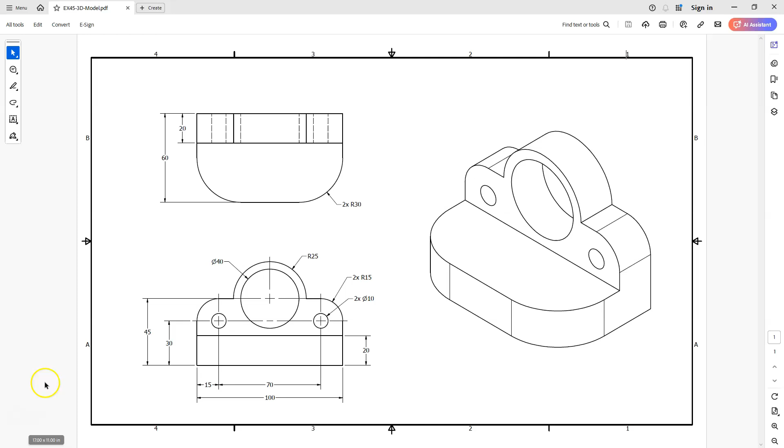Now, if you followed along in the AutoCAD video where I created this using 2D AutoCAD, you'll see that I already have the isometric here. We can go ahead and copy and paste this into our other drawing and start from that way. But in this video, I will go ahead and draw the isometric for you again. I'll also show you just how to copy and paste this, and it's just that simple.

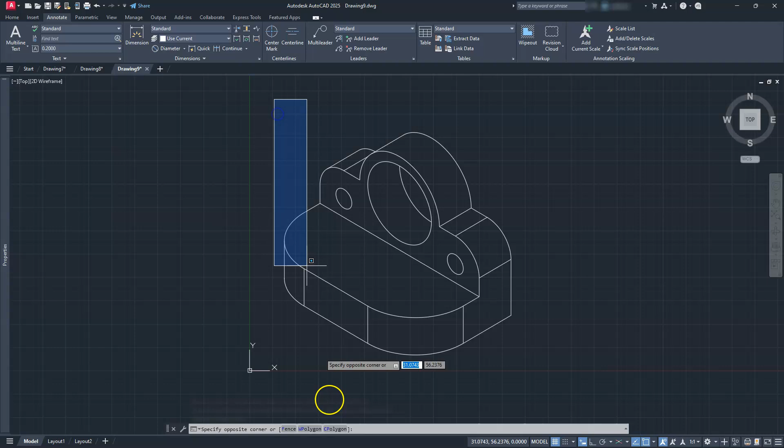We can just highlight this and use the regular Control-C. We can copy this, and then we're going to create a new sheet here, and then I'll paste it. So I'll just come here and go to Control-V. Once everything loads up, there we go. So now you can see that it is sitting there behind it. I'll zoom the extents here in a second and you can see it. Rather quick way of doing that, but let's go ahead and draw this from scratch. So let me delete this real quick, and let's get started.

The first thing we need to do is set AutoCAD up into isometric. It's just simply by selecting that button there. Let's turn this grid off; there's no need to show that. And make sure that we have our ortho on. I can also verify what running osnaps I have on, and these are the ones I'll be using for this video. Now we have our isometric set. Remember that we can shift everything with the F5 button, or in this video I'll be using the flyouts next to it, but you can also cycle through these with F5. Let's start with the line.

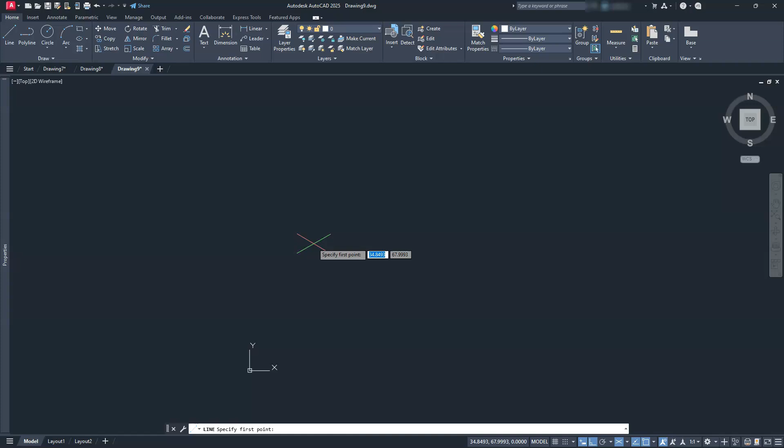Let me jump back to the Home tab and use a line. I'm going to lay out this bottom portion here. I'm just going to go right around this way and give this a distance of 100. Let's go up this direction, a distance of 60. Back this direction, 100. And then C to close. Let's switch this to isometric right. Then I can start creating this other side here. I'll use a line from this endpoint and go up a distance of 45. I'll come forward a distance of 20.

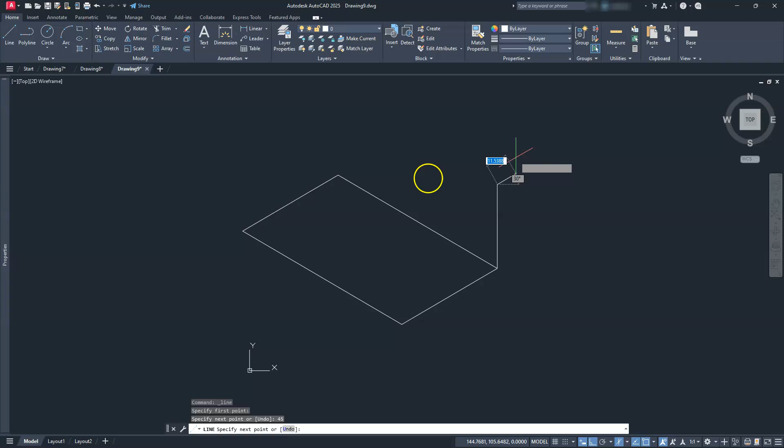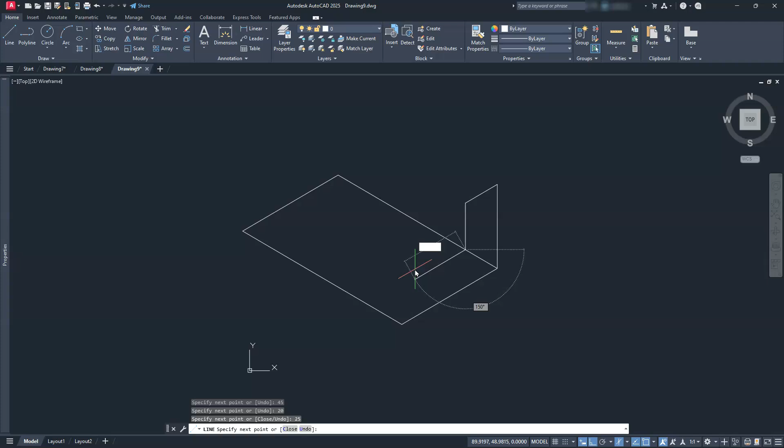Now we have to do a little subtraction. We know that we went up 45. Let's subtract the other 20, so we're just going to come down a distance of 25. We'll come back this direction, and remember that that number was 60. So if we subtract that 20 from that, we'll have a distance of 40. And then we'll come right down to that endpoint. So I'm just laying out a rough stick figure here.

Now, this is totally different than what I did in the other video. I'm just showing you that if we didn't have those curves, we could create it exactly like this. But since I do have those curves, I'm going to get rid of this portion and then create it. But if I didn't have those curves and was making everything with sharp edges, let me finish this just to show you the difference. We can create this shape here, and all I did there is copy that. If you don't want to do that, I can simply go back to isometric left and start a line from this endpoint.

See, it looks like I'm not in the line command. Then we'll go over this direction. Remember that distance is 100. We'll go down 20.

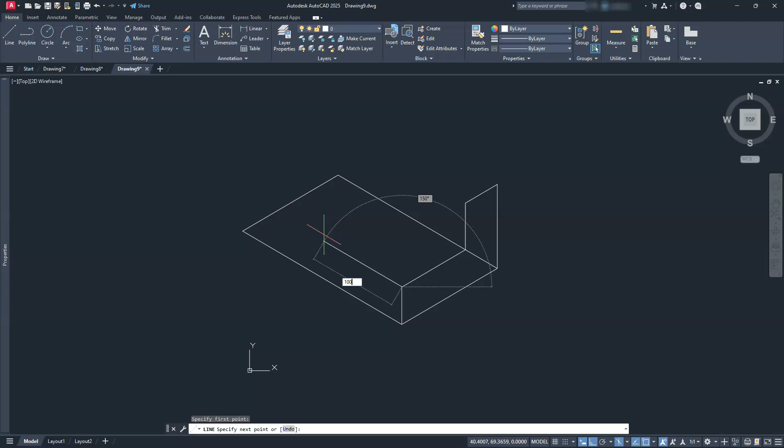Then we can utilize the copy command and grab all of this. So I could just select these lines here, choose copy,

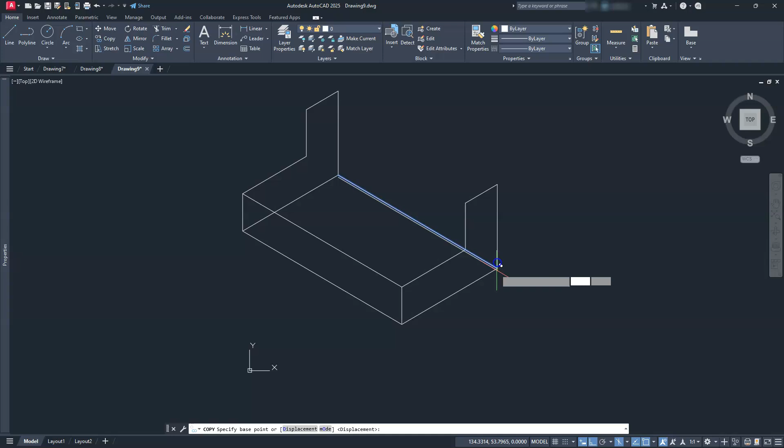go from this endpoint over to that endpoint. I can copy some other lines here. Let's use this and copy that line from this endpoint, and then I can just place it at 3 different locations, right? So one there, one at that endpoint, and then another one at that endpoint.

Let's go ahead and delete this line since there's no need to see that one. And we should be able to get rid of these two lines.

Okay, so this is kind of what I was referring to. If these were all nice and sharp corners, this would be no problem for us. But since we do have these round fillets on here, and we can't use the fillet command, we have to create those. So the next step I'm going to do here is switch back to isometric top, and I'm going to go ahead and put the fillets that are located on here, right?

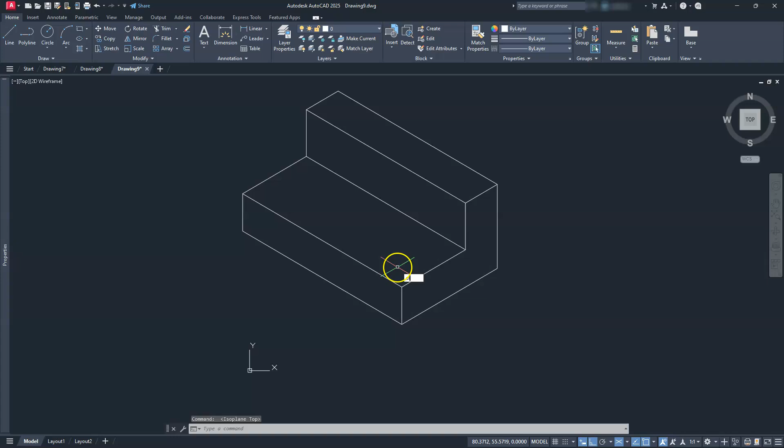The way that I'm going to do that is I have to start off by typing in EL for the ellipse command. I have to give it a point. I'm just going to click this endpoint for now. Oh, I took one, I'm sorry, I always make that one mistake. Let's escape out of that. Let's go EL, enter. There we go.

Click this endpoint here, and then I have to tell it that I'm using an ISO circle. It looks like I did it again. So EL, enter, I, enter, and then click this endpoint. There we go. Once I do that, then I can give it the radius here, and the radius is going to be set to 30.

What I like to do from this point is I'll just go ahead and copy this circle to the other side. So I'll select it here, go to copy, go from this endpoint to the other endpoint.

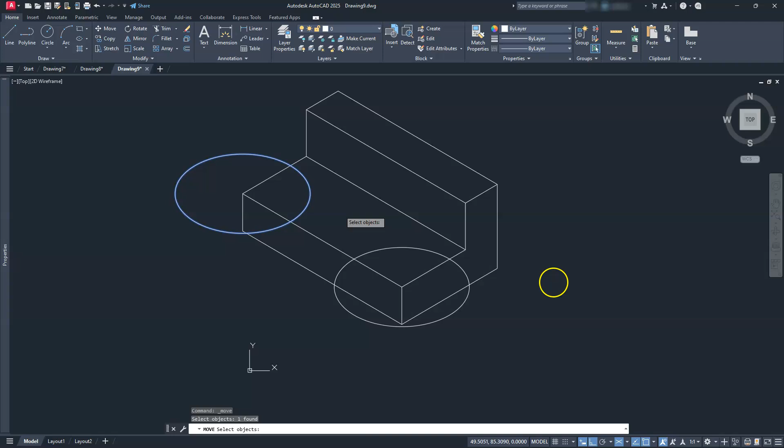And what I'm going to do next is I'm just going to go ahead and start moving some things, right? So I'll go to move, select this ellipse, hit enter, come this direction. So I selected a line, come that direction, type in 30, do the exact same thing with this one.

So I'll select here, and then I'll use the move command. Select this endpoint here, or just select a point here, and go that direction, give it 30.

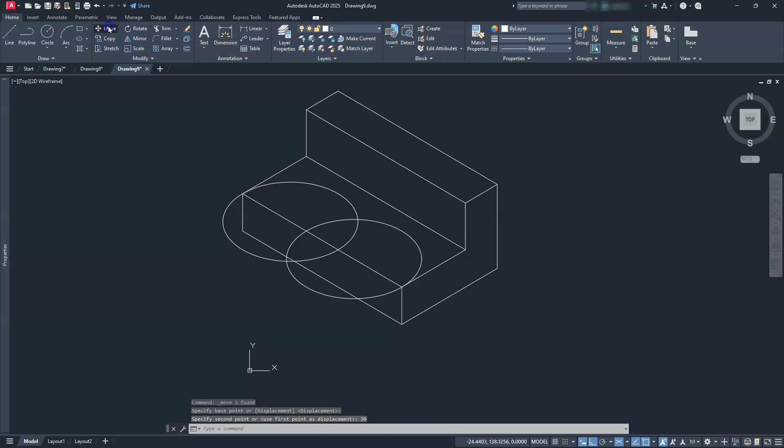Go back to the move command. This time select both of your circles. Enter. Pick a base point, go this direction, 30. Okay, so I have these two arcs here.

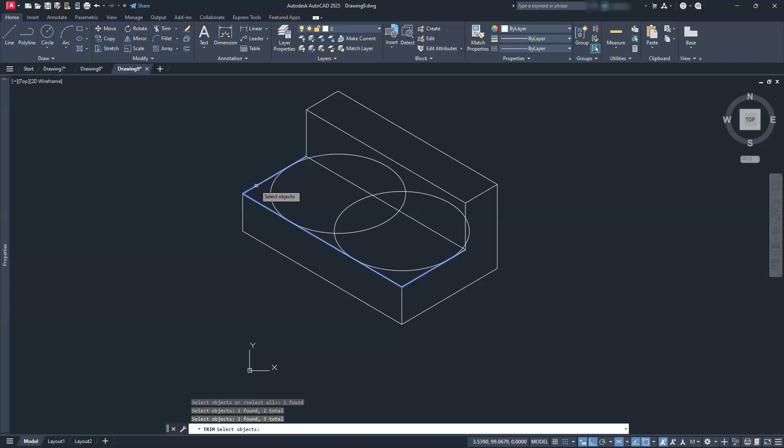Let's use the trim command, and I want you to go ahead and use cutting edges, just so it'll save us some time. I'm going to select this line, this one, and this one. Enter. And now all I have to do is just trim off these portions, right? So it should trim there and trim here.

Okay, next thing I'm going to do is copy these two arcs from this endpoint, going straight down to this endpoint.

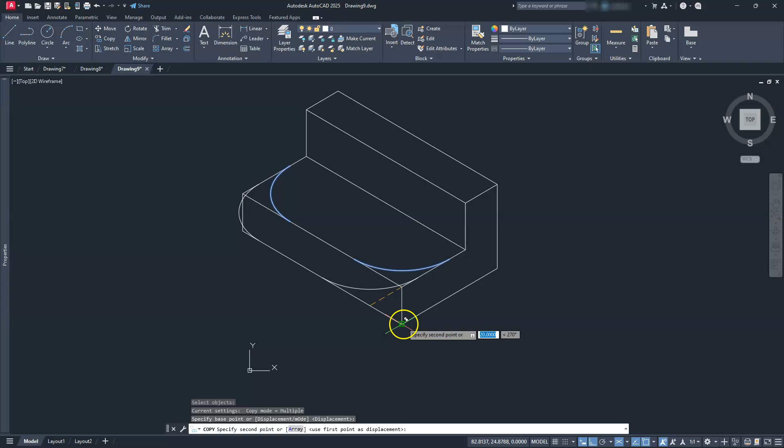Okay, so on this side, I'm just going to work on this half. I'm going to select the line here, go to move, select this endpoint, and then I'm going to place it on this midpoint here.

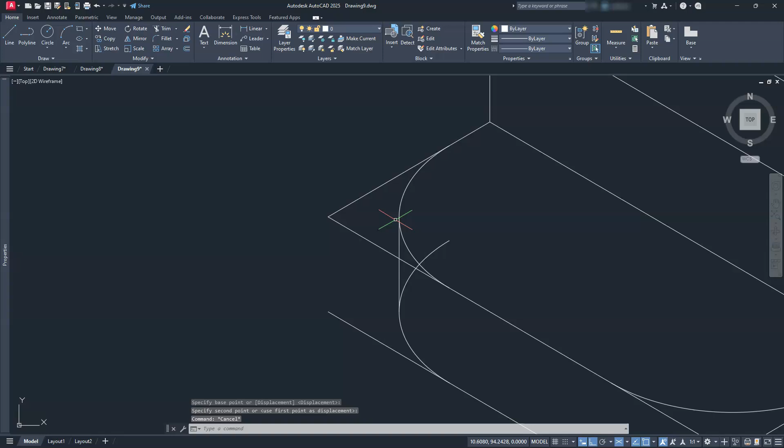I'm going to come and take a look at this side. Select this line here, and this time I'm going to choose copy. I'm going to use this endpoint, and then I'm just going to copy it at that endpoint and at this endpoint. Okay? All right, so now we should be ready to trim.

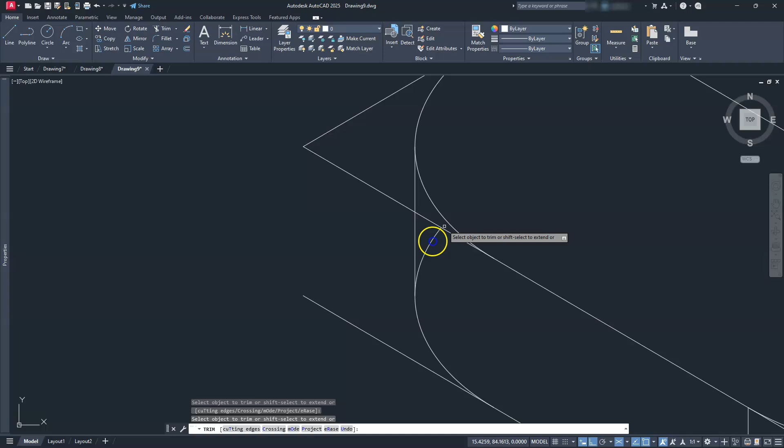So let's go to trim. Let's work over here first. So we're going to trim this back right until it gets to that line.

We can go ahead and get rid of this line here and this one. Let's go ahead and trim all of this stuff back. Next, let's work on the other side here. So let's pan up. We'll go ahead and trim both of these lines.

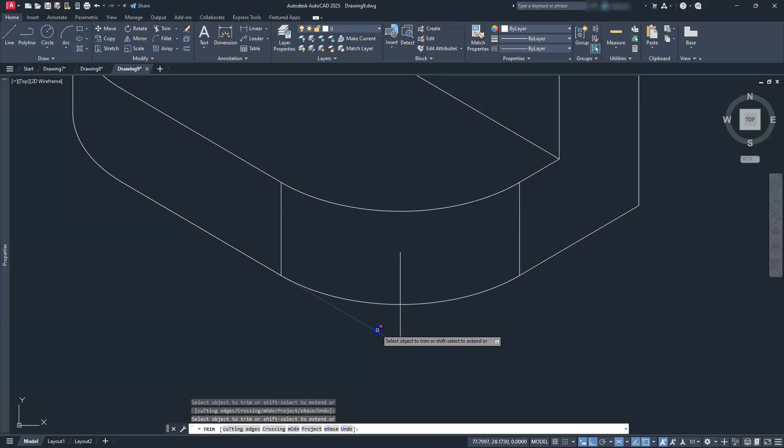Both of these lines, and then this line here, we'll trim it twice to get rid of it. Let's escape out of that. So now you see that we do have that created. That's the bottom portion.

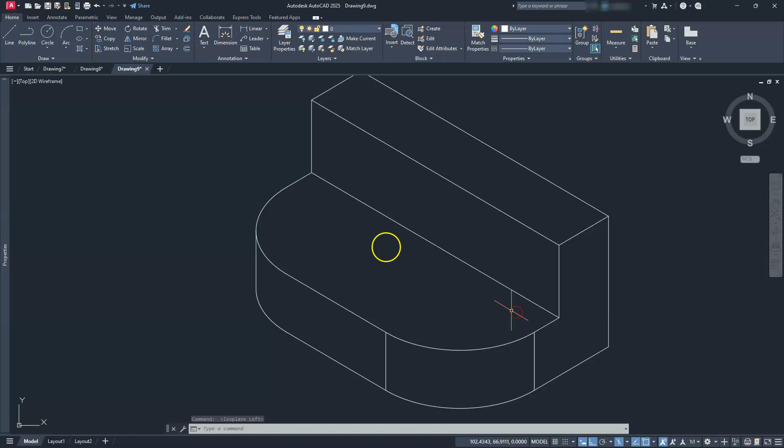Next, we'll go ahead and put our fillets that are located on these two corners here. To do that, I'm going to first start off by switching to an isometric left. Exactly like we did here in the beginning, we went to the ellipse command. Type in EL, enter. Tell it that you want to use an ISO circle, so type in I, enter. Click this endpoint, and then give it the radius, which is going to be 15.

Go ahead and copy that circle, so I'll use the copy command. Select here, going from this endpoint over to this endpoint. Remember we did the move thing, so let's go ahead and go to move. Select this circle here, hit enter. Click here, come down this direction, a distance of whatever the radius is. In our case, that number was 15.

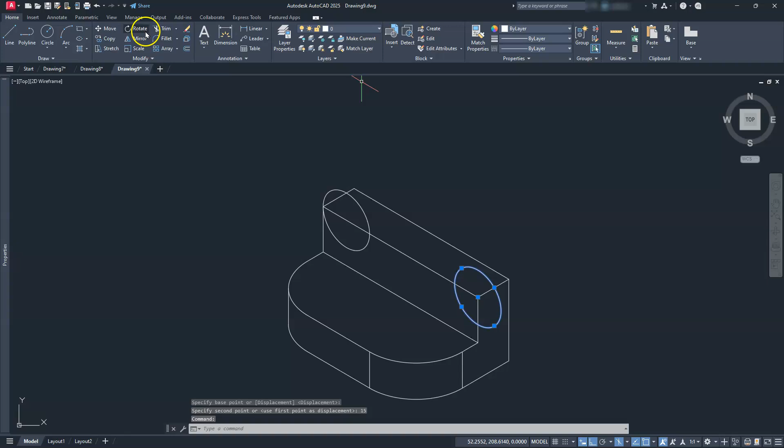Do the exact same thing here on the other side. So I'll select, go to move, click a point, drag this direction, type in 15, then select both of the circles, go to move, pick a base point, and then send this one down, 15.

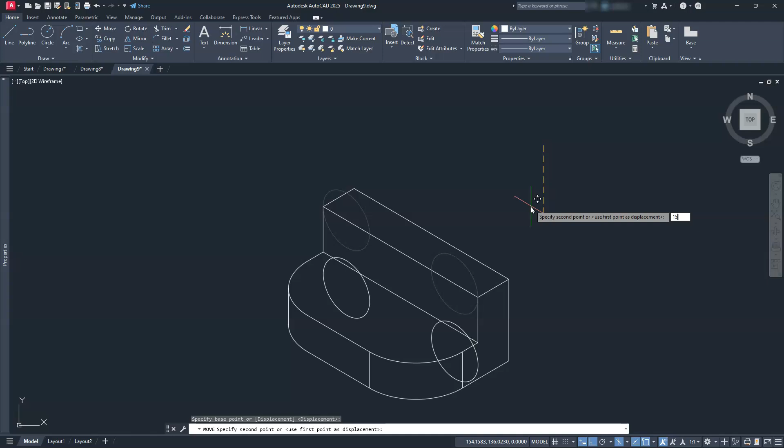Trim command again, so let's use trim. We're going to select cutting edges, so go to cutting edges, select these 2 lines here, so I got one there, and one here. Enter. Let's go ahead and trim off these portions.

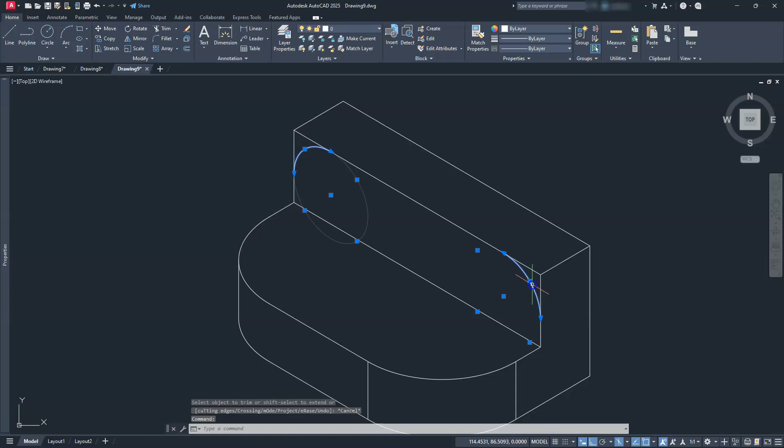Select both of those arcs, and then we're going to go ahead and copy them, right? So I'll go to copy. I'm going to use this endpoint to this endpoint.

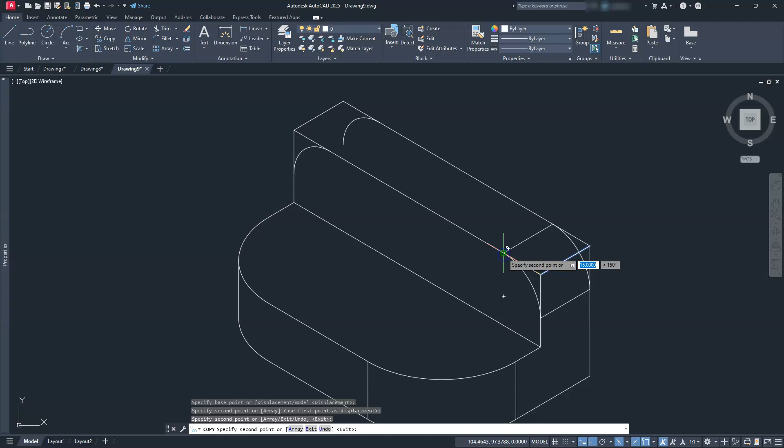I'm going to select this line here, I'll use copy. I'll use from this endpoint, and what I'm going to do is select - it's going to be an intersection or an endpoint here. We should have another one here. It's going to be one on this side. Let's see if I click. There it is. And then we should have a midpoint or a quadrant here.

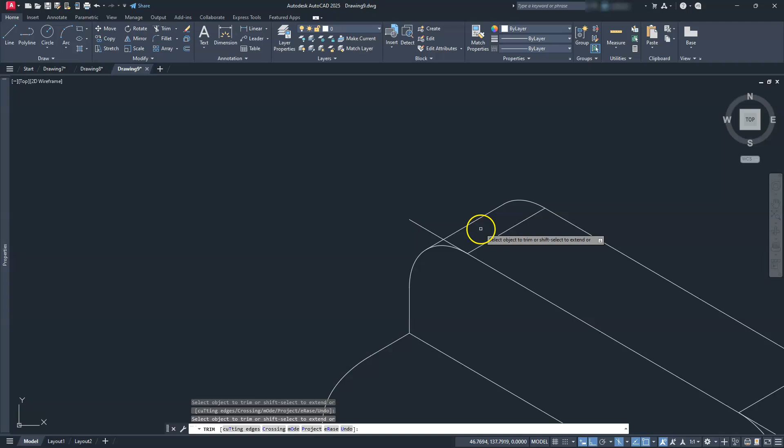Now I'm going to purposely leave this front line intact, right? So we're going to go to the trim command, and then I'm just going to trim off some of these lines. Starting on this side, I'm going to trim here, this portion, and then here. I'm going to trim off this bottom piece here. Now, like I said, I'm going to leave this top line intact.

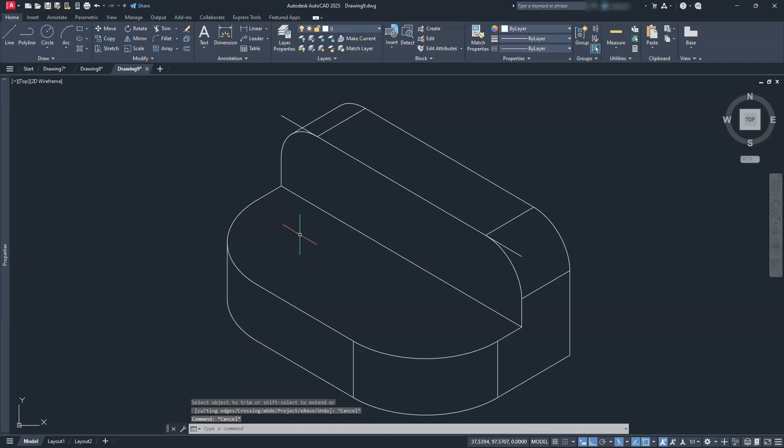Let's go ahead and work on this side. We're going to trim off these 2 lines and this one. Let's go ahead and get rid of this line now, we don't need it. Okay, let's go ahead and escape out of this command. So now we have this created.

Now the reason I left that there is because I still need that midpoint there in order to draw my other 2 circles here. So I'll go back to the ellipse command. EL, enter, I enter. Let's go ahead and click on this midpoint here and then draw the radius, which is 25.

Okay, we're going to do that again. So we're going to type in EL, enter, I enter. I'm going to go to this center. This time we're going to change to a diameter, so I'll select the diameter and then give it the diameter, which is going to be 40.

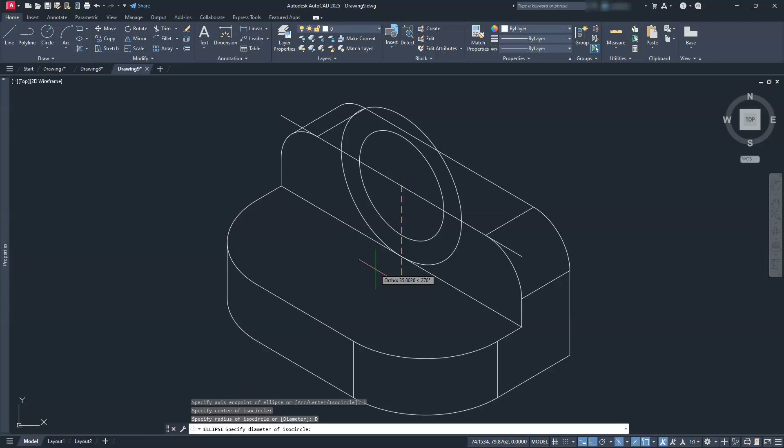Let's go ahead and copy these 2 circles. I'll go ahead and pre-select them, so I'll select both of them here. Go to copy. I can use this endpoint to this endpoint. Okay, let's escape out of that.

Let's go ahead and select this line here, use copy. Let's see, it looks like I may have lost that line, so I'll go to copy, select objects, hit enter, go to this endpoint here. And then I'll go ahead and place it. I should have a quadrant sitting there.

And then this is where you're going to have to kind of find out where you're going. So I'm looking at this circle here, and wherever it intersects with this line is where I want that line to stop at, right? And I don't think I'll be able to see it along the other side there, so I'm going to leave it how it is.

Let's escape out of this command, and then we're going to work with the trim command, right? So let's go to trim. Next, let's go ahead and get rid of these lines that we know we don't need anymore. So I'm just going to get rid of this edge here. Likewise on the other side, I'm going to go ahead and trim off these 2 edges.

Okay, now I'll work with my circles here. I know that this big circle, this part goes away, and this part. And the exact same thing happens on the back side.

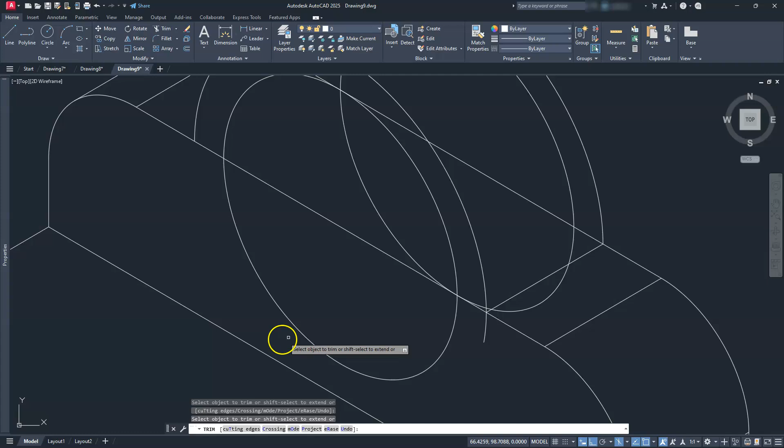It looks like I accidentally missed that piece there. Let's go ahead and trim that off. Okay, all right, so all of that looks good.

Next, I'm going to worry about this inner circle here. So I'm just going to start here, and I'm going to start trimming this all the way until I can see it opening through here, and I'm going to stop it right at that point.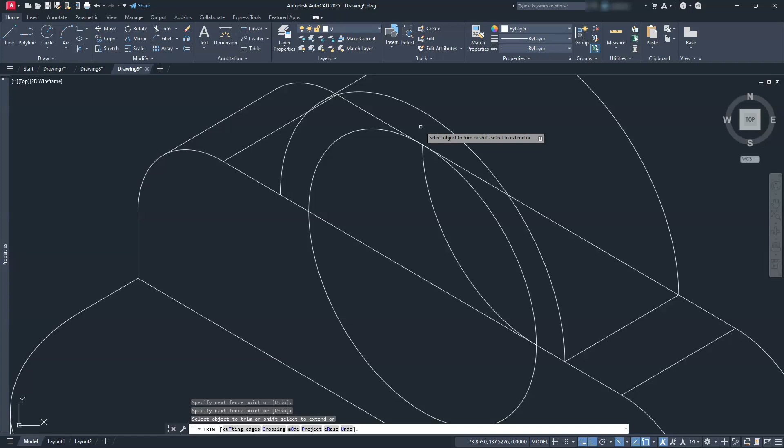Let's go ahead and work here at the top as well. Let's go ahead and trim that piece off. Now let's get rid of this line that's going through here.

So I'm just going to start here, click this one, and then this one. And I should have a line right here.

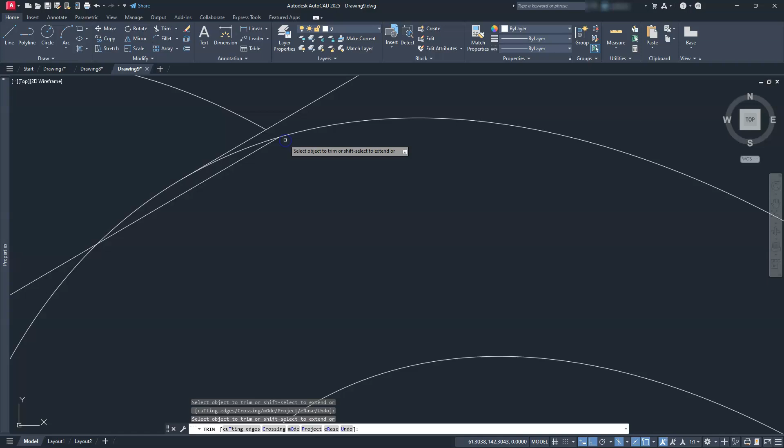Okay, we have one on the back side here, and everything that we know from this point here is going to kind of be invisible. I'll trim off this one, as well as this line here. All right, so we don't have any of that visible.

Then we're going to just keep trimming along here. Okay, I'll go ahead and hit escape.

Okay, and it is also determined that those centers of these circles happen to be at the center of these ellipses, so that's going to save us a little bit of time here. So we're just going to use the ellipse command: EL enter, I enter.

Go find the center of this circle here, or iso circle I should say. Click on it there, go down to diameter, and this has a diameter of 10.

Okay, next we're going to go ahead and copy this. We're going to use the copy command. Let's go ahead and take this circle here, or iso circle I should say. Go ahead and hit enter.

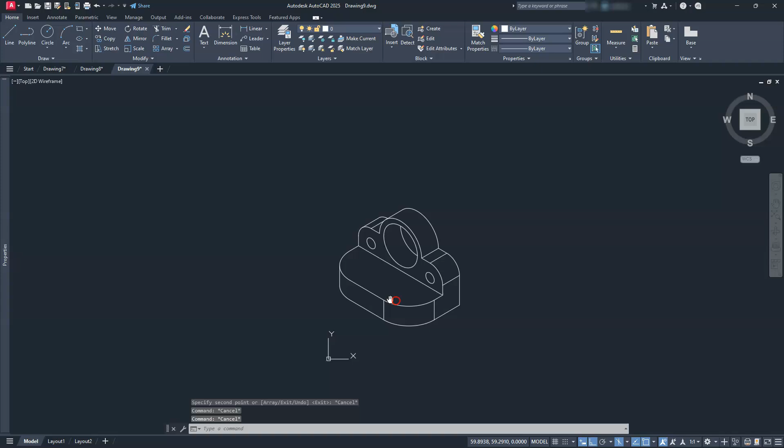I'm just going to go from this center, and then I'm going to go and find the center that's located somewhere over here, which is at that location. Then I'll hit escape. Okay, so now the isometric is complete.

Now we're ready to set up the next portion of this, which is going to be dimensioning this. So we're going to go ahead and put this on a title block. I'll show you how to set that up, and then we'll go ahead and start doing our dimensions.

Okay, so let's go ahead and start off by defining our title block. Let's go ahead and get out of the isometric here. We're going to type in REC, which stands for rectangle, or you can come and click that icon there.

I'm going to type in 0,0, that's where I want my lower left at, and I want my upper right at 17,11. Okay, just going to zoom the extents and see if I can find where that is at. You can see it's there at the bottom.

Let's kind of take a look at this for a second. Let's go ahead and use the offset command. So I'll go to offset, give it a distance of 0.25, enter, select this line here, come to the inside, escape.

Okay, I'm going to go ahead and set up my layers right now. So I'll go to layers, and then I'm going to define the ones I need. So we're going to have a dimension layer.

We can go ahead and make a center layer. Looks like it didn't type it in for me. Okay, we don't have to have a hidden layer, but I'll go ahead and type in one for you, so that's going to be a hidden layer. And then let's go ahead and give a border layer, let's just call that BRD.

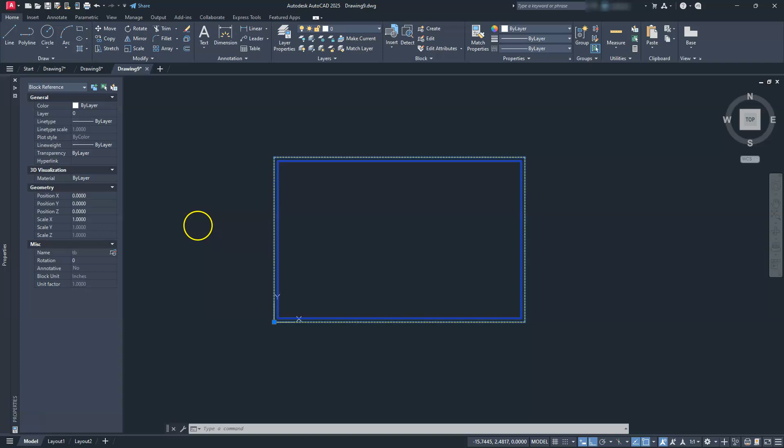The benefit of doing this is now we can figure out what the scale factor is. So as I select this, I'm going to go ahead and go to my properties window. If you don't have this property window open, you can always select your object first, do a right click, and then go down and find properties. Once I find properties, then I need to figure out what scale it is. Let me zoom out a little bit so we can take a look and make sure that our title block can fit this on the inside.

Remember, the rule is that you scale your title block. Do not scale your object, right? Or in that case, there's a little bit more to that. You do not scale your main object. So let's go ahead and play with this a little bit, and let's go ahead and see what a title block of an 8 looks like. So you can see that that 8 does not quite fit what I need it to be, right?

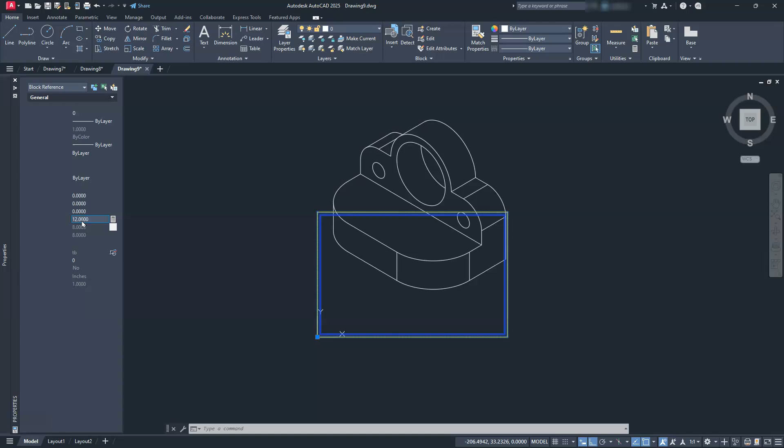Let's go ahead and see what a 12 is then. So we have a 12. And is that enough room to fit everything in there? And it looks like it is not. And I'm just going to show you that by moving this around on the inside of it.

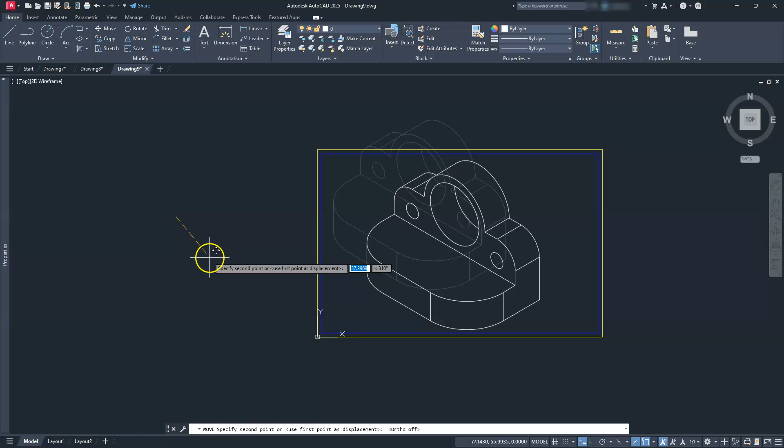So if I select here, enter, click here, and you're going to see that, let me go ahead and turn the ortho off, that when I try to move this around, it fits. But I don't have necessarily enough room to put in all of my dimensions. So yes, 12 technically fits it, but we're going to need something just a little bit bigger.

And I'm coming over here and trying to figure out what's happening here in my scale factors, right? So I have one that's set to 12, and then let's see what this one is. And there is a way to calculate this, right? So this is one of those things where you're going to have to calculate. And I know I have a video somewhere where I explain exactly what this 3/4 equals a foot is.

But in our case, the shortcut method for this is that you multiply the denominator by the other number on the other side. So I'm just going to take 4 times 12. That's going to give me 48. And then I divide it by the numerator, which is going to be the 3. And that gives me a scale factor of 16. So 3/4 equals a foot has a scale factor of 16.

So now when I select this one and I see what a scale factor of 16 looks like, does that fit? And that looks just enough to where we can get everything in here. Everything looks all nice and neat. So I'm just going to go ahead and move this up a little bit more. Yep, and that's going to be plenty of room for us. So our scale factor is 16.

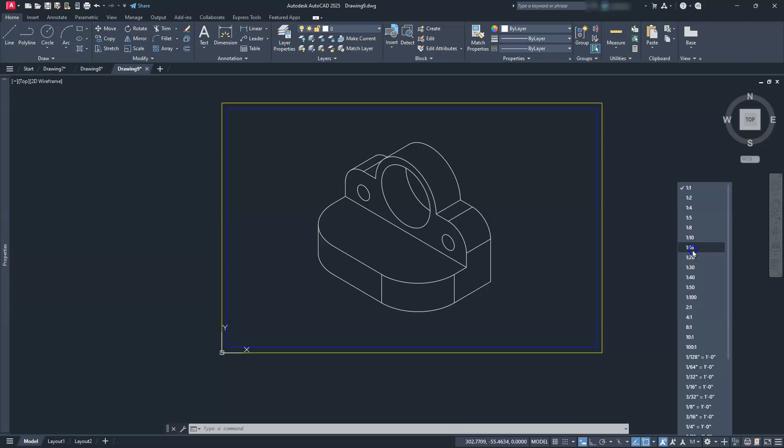We're going to come here to the fly up, and then we're going to actually click it here. So if I come here, I can select the scale factor of 16 here, or if you're using the metric conversion, the 1:16 is the exact same thing as that. This one is dealing with architectural units, or imperial units if you like to think about it. This one is going to deal with your metric units, but it's not going to change the way AutoCAD functions. Both of those are exactly the same. So I'm going to go ahead and select this one here at the bottom.

Now, once I change that scale, you can see that my line types are not showing up the way that they should. I'm just going to type in REA. That just stands for Regen All. Once I hit enter, you're going to see that I get my dash lines to appear.

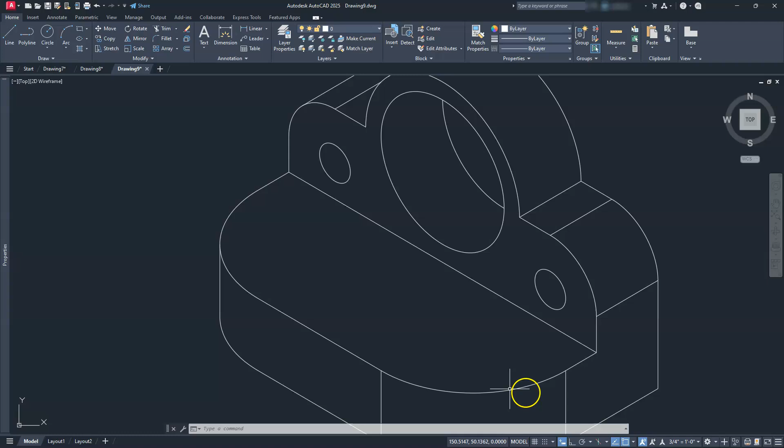All right, here's another thing that you're going to find out about when you're dealing with stuff, especially using isometrics, is that we can't use our annotations or things of that nature, some of our cheat codes. So I'm just going to come back to here, and then down to here, and I'm going to go ahead and draw a line. Now, I know that the diameter of this one is 10, and then outside of here, this radius is 15. So if the radius is 15, then the overall diameter of this has to be 30, which means that I have to have a line at least a distance of 30 or more.

So I'm going to start off with the line, click here, and go down. Let's go ahead and put the ortho back on. And I'm going to go down a distance of more than 30, so let's make it a number like 33. Let's escape out of here. I'm going to draw another line going this direction, 33 as well. Let's go ahead and hit escape.

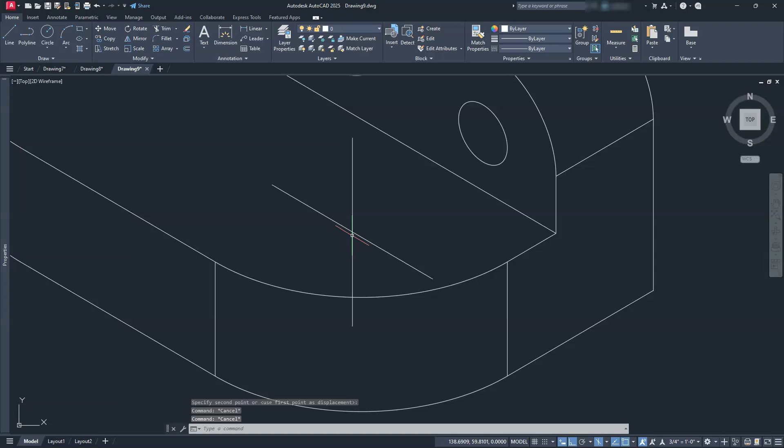I'm going to select this line here, go to move, find this midpoint on this line, and place it at this midpoint here. Okay, let's escape out of that. I'll select both of these lines, go to move, select this midpoint, and then place it at the center here.

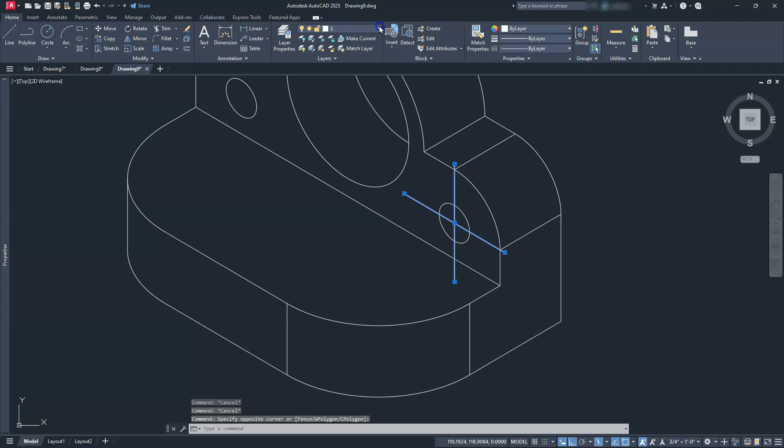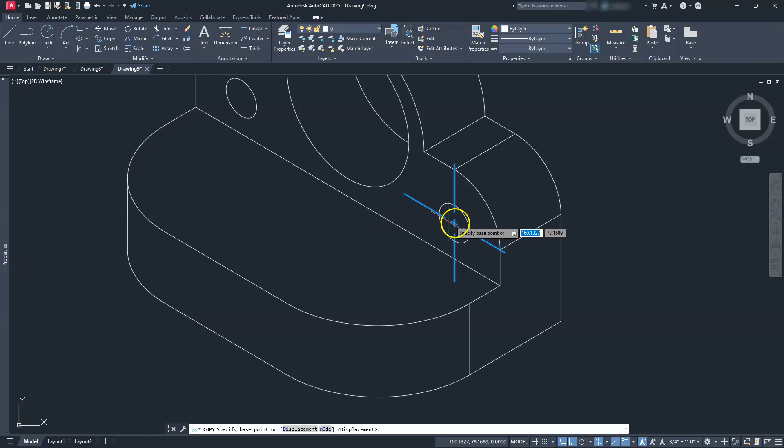Okay, I'm going to select both of these lines that I just created, come here to this layer, and tell it that it needs to be on the center layer. Let's escape out of this. Oh, don't think I changed it, did I? There we go. Next, I can select these two lines again. Go to copy. I'm just going to use this midpoint again and place it on this one.

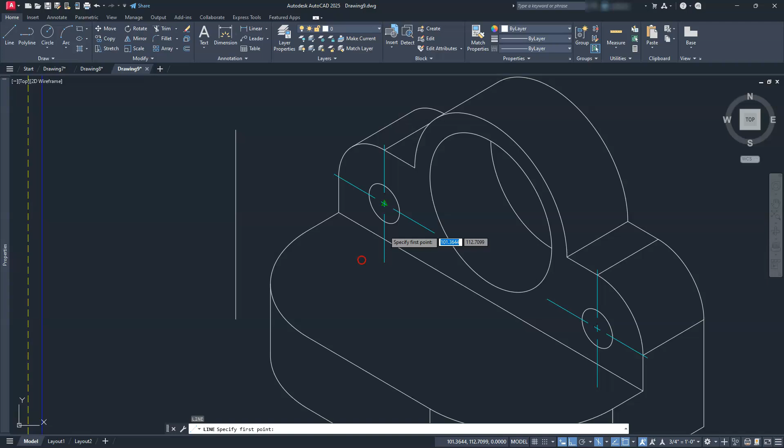Okay. Now the same thing we're going to have to do with this one, right? So we know that this outside radius is set to 50. I'm sorry, 25 is the radius. The diameter of it is 50. So I have to create a line that's more than 50. So I'm going to come back and draw a line. And then let's make this line somewhere like 53. Let's just barely make it go off of it. So 53 is fine. Let's draw another line going this direction at 53.

Escape. Let's put these two lines together. So I'm just going to go ahead and move that line from this midpoint to that midpoint. Okay, I'll go ahead and select them both. Go ahead and put them on the center layer. Escape out of this. Then I'm going to go ahead and place this line. So I'm going to select, go to move, select this midpoint, and then place it at this center.

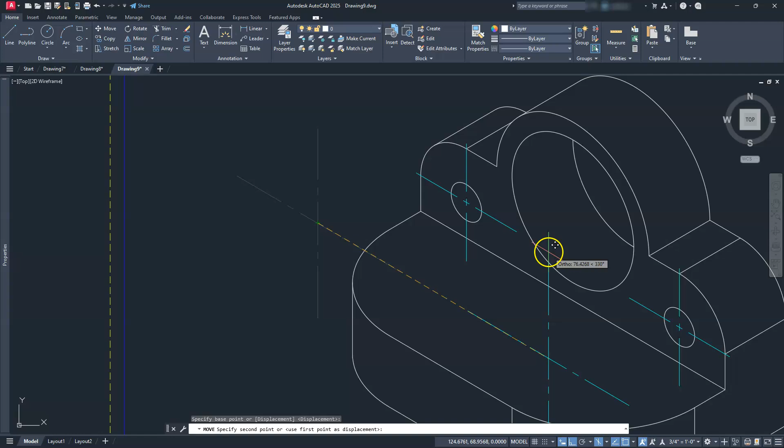Okay. Now, what we typically like to do is have this plus in the middle. I'm going to have to kind of play with that a little bit, right? So I'm going to select both of these lines. I'm going to come to my properties window, and this is when I'm going to increase this number, right? So I want that plus to be in the middle, and I only want one plus. So let's see what 2 does. So I'll make it twice as big, and now you can see that that plus is right in the middle there. Okay. All right. So we've done everything we needed to do for our center marks.

Now we have to do some setting up in order to make our dimensions work and make sense, right? We got to do 2 things. The first thing I'm going to do is I usually like to go ahead and adjust a text style, right? And the way that we're going to do that is that underneath the annotation here, I'll click on this first icon, and that's going to bring me up to the text style. Give it a second here. I'm going to use the annotative one. So I'm just going to click here. Go ahead and double click on that. And then we're going to create a new one, right? We're going to call this first one 30. Go ahead and hit OK on that.

And then we're going to create another one, right? Let's call it, I wish I can call it -30, but well, maybe that might work. Let's see if -30 will work. Okay, so I have 30 and -30, right? So this -30, let's go to the obliquing angle and change it to 30 here. Wait a minute, that'll be a -30. And then we'll go to this one. Go ahead and hit yes to that question. Yes, we're going to save it. And then on this one, we're going to make it 30.

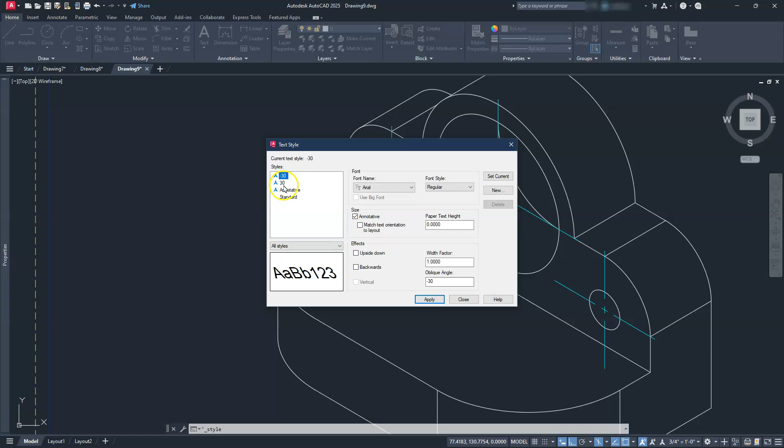Okay, so we have those three. And let's go ahead and save that as well. Okay, so we have a -30. Its obliquing angle is at -30. We have a regular 30, which has an obliquing angle at 30. And then we have our regular annotative. I'm just going to double click on annotative. That should be fine. Let's go ahead and hit close. Okay. So that part is done.

And then the next part of this is that anytime you're dimensioning this kind of stuff, you're going to find that it's going to get a little difficult when you're going to put your dimensions on this, right? I'll show you what I mean by that. I'm trying to think of how I can explain that to you, but it's probably easier for me to show it to you once we get to that portion. So let's go ahead and set up our dimension style. So we're going to come here to the dimension style and click this icon to open up the dimension style. We're going to double click on the annotative. I'll go to modify.

And once this appears, we always work from the right to the left, just how my brain works. So underneath the primary units, we'll go ahead and get rid of any of the trailing zeros. Underneath the fit, we shouldn't have to worry about that since we're using the annotative one. Underneath our text, we can use either one of these, but right now leave it set to standard or annotative. I guess it really doesn't matter which one of those we select. We're going to wind up changing them if need be.

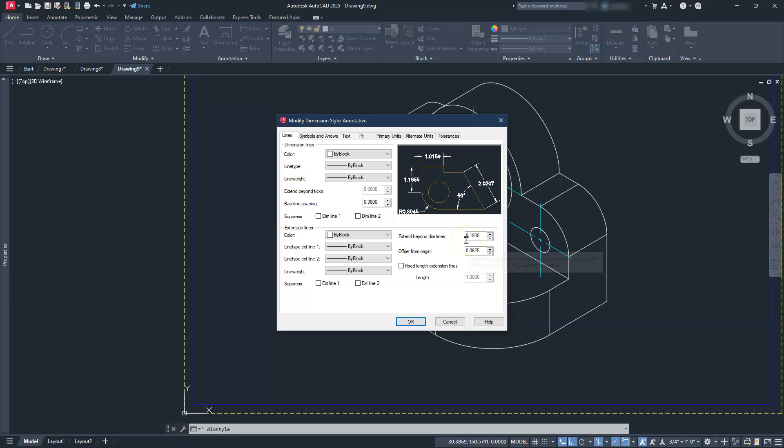Underneath the symbols and arrows, go ahead and make this none. We don't need to really change this. This is another one of those complicated things you're going to find out when we dimension isometrics, is that we can't dimension circles like we normally do. And then underneath the lines here, we'll just go ahead and leave this one the way it is. So we're going to leave everything ByBlock on purpose, right? Let's go ahead and hit the OK button and then close.

I'm going to jump over to the annotation tab here. And then where it says use current, I'm going to select this drop down and tell it that I'll be using the dimension ones. Okay. Now we're ready to put our first dimension on. And this is what I was trying to explain to you, is that if I want to dimension this first one at 100, remember I have no way of specifying this distance between, right? I absolutely have no way that I can place that dimension on here.

So what I have to do is give myself some guidelines here. What I mean by that is I'm going to come here to the home. I'm just going to draw a line from here going out this direction. Go ahead and hit escape, and switch over to isometric right. We're going to draw a line going out to this direction, right? So I'm going to make a line from here going to this direction. I'll go ahead and trim these two lines.

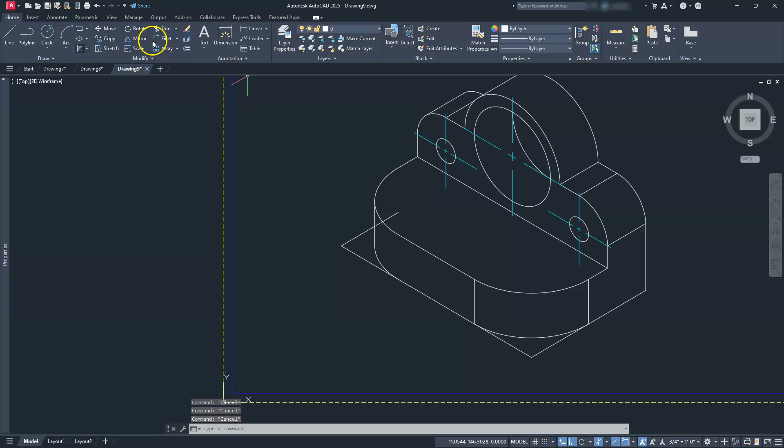And what I like to do now is take this line here and just copy it, right? I'll go from this endpoint over to that endpoint. Then I'll take this line here and copy it from this endpoint over to this endpoint. Okay, so now I can decide to trim off that extra piece, but I'm going to leave it for now. Let me move all of this up a little bit. So I'm just going to go to move, click a base point here and go up a little bit.

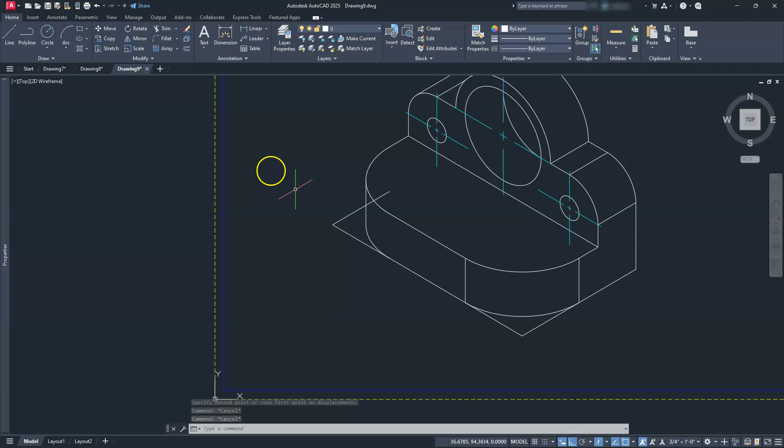Okay. So now I want to place a dimension on here. When I use a dimension, here's another option that you have to use. You can't use a linear dimension. You have to use the aligned one. I'll go from this endpoint to this endpoint, then I'll come down and place this dimension, right? Okay, so all of that seems to be fine. Now we need to get this thing to either lay down or stand up, whichever way I want. And that's going to be your obliquing angle, right? So depending on how you want your obliquing angle to appear, that's what we need to adjust.

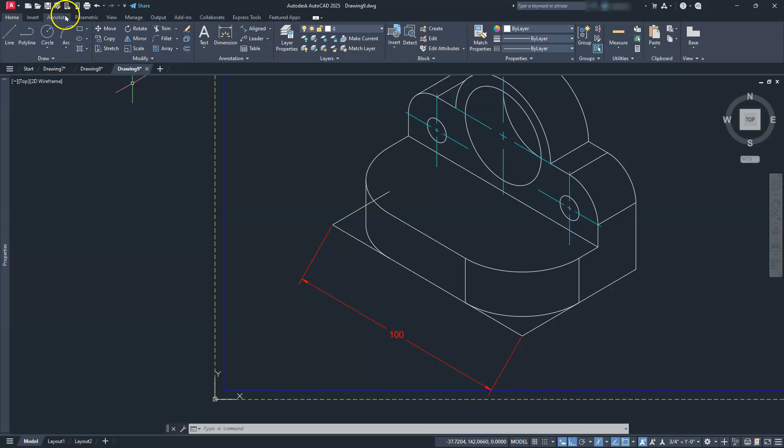I'm going to come back to the annotation tab. Underneath the dimensions icon here, the second icon is called dimension obliquing, right? So I'll select that there. Select this dimension, hit enter, and then it's going to ask me for an angle. I'm just going to give it an angle of 30, and you're going to see that this will come straight out. Right? Now the other thing that I was showing you is with the dimensions.

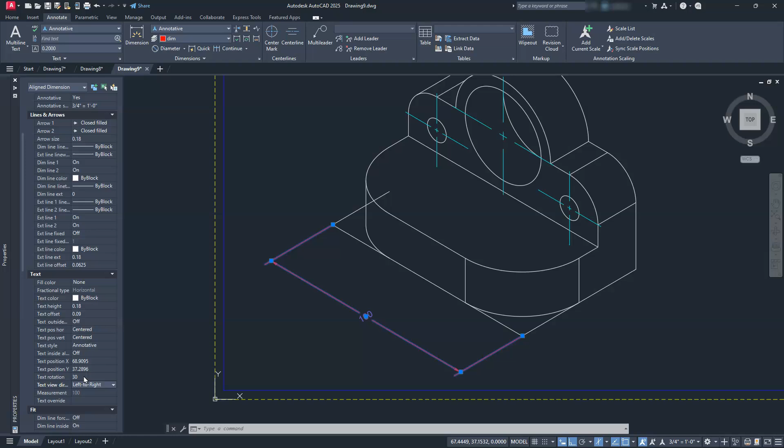So I'm going to select this. I'm going to go to the properties, then down to the text, and I'm looking for text rotation. Okay? So at this point, I'm going to type in 30 here. It's going to depend, and you see which direction that's going. So if it's going the wrong direction, go ahead and change this to a negative 30.

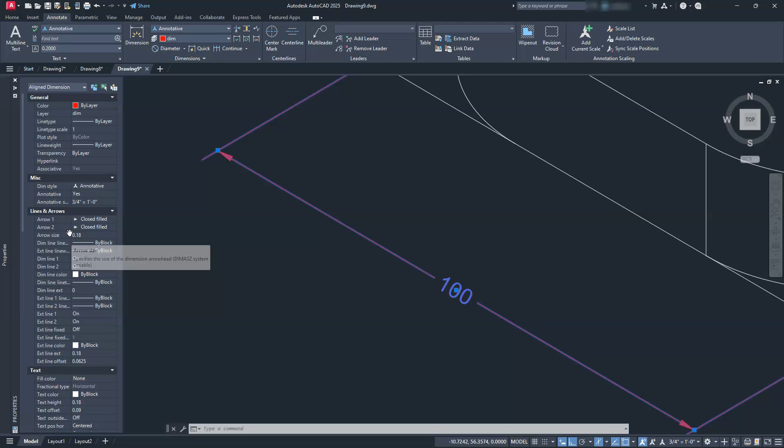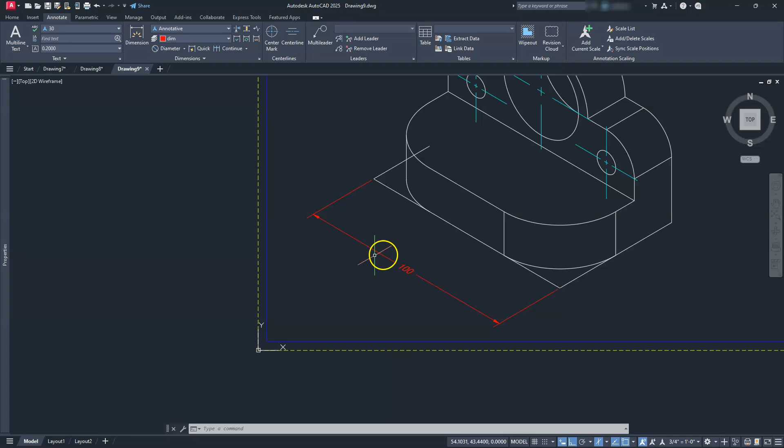All right. And then I can have this either lay down or stand up by coming up to the text, and underneath the text style, I can click here. And then remember those 30s and negative 30s, right? So you can see that my negative 30 is going to stand it up. But if I use a regular 30, it'll make it flat. Okay? So that's one of those little tricks of the trade that you will learn. Another thing that I like to do here is use the match properties to kind of mimic the other ones, right?

So I can go here, and then I can match properties here so you don't get them confused with my actual lines here. Okay? All right? So the exact same principles will apply if I wanted to copy this up. And it looks like I did forget a line there. Let me go ahead and place it there here in a second.

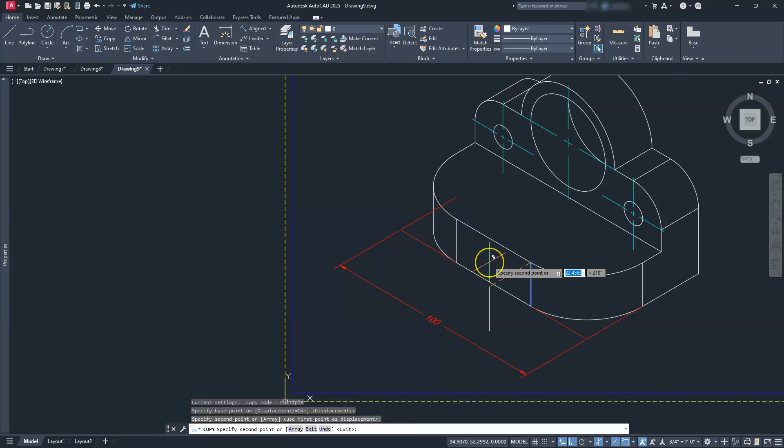Let's go to copy, select this line here, hit enter. Go from that intersection to that endpoint. Okay, that looks better. Okay, so that's going to give me that distance there. And likewise, if I wanted to put a distance over here, right? So what I would do here is I would copy these two lines. Go ahead and hit enter. Go from that endpoint to this endpoint.

And what I tend to like to do a little bit more is I'll go ahead and draw a line that goes from this endpoint to this one. And if you wanted to, you got two different options here. I can either leave them this way, or I can make them on my hidden layer that I created before. So that way, oh, I keep hitting escape too quick for myself. I can go ahead and differentiate those from my actual drawing here, right? Meaning that I can go ahead now and I can delete that since you won't see it, but you can see that this is now something.

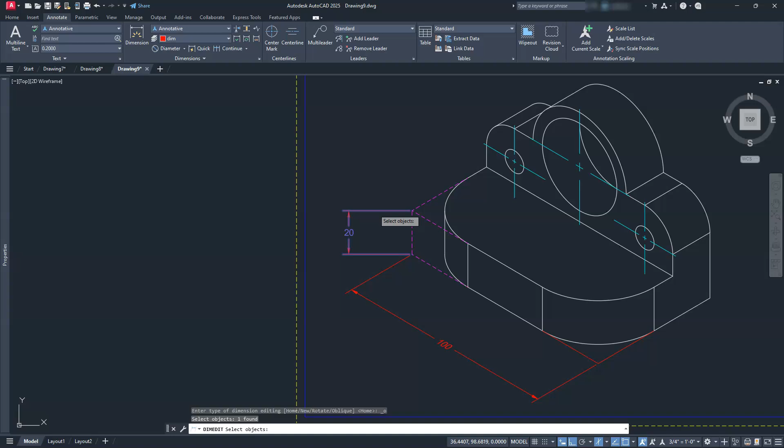Let's go back to my aligned dimension here. Let's go ahead and place an endpoint to endpoint here. Go ahead and drag this out. And then which way do I want this to go? Do I want that to be extended off that way, or do I want that to be extended in line with my 100? Remember, that's underneath the dimension icon here, and go to oblique. Go ahead and select this line here, hit enter, give it this obliquing angle, which is going to be 30, and hit enter. You can see that now that's in line with this one.

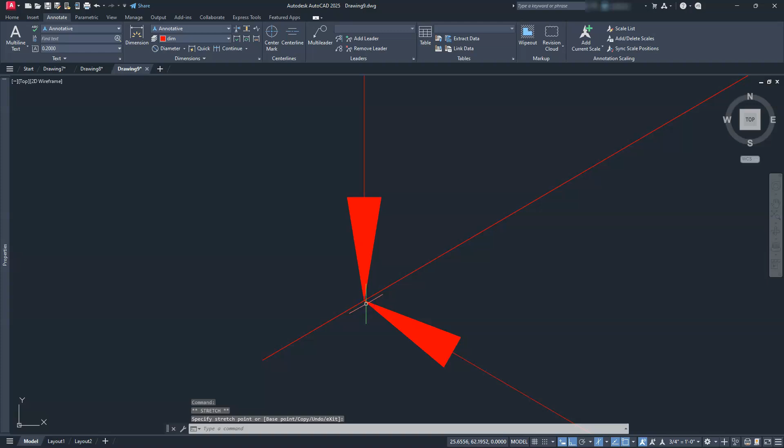I can go ahead and select this dimension now. I can go ahead and click on this endpoint, and then put it at this endpoint. Okay, and then we can play around with this like I did before. So I can come here and I can come to the properties and go find the text rotation. I can either type in 30, and that looks like to be the direction that I want it. If it's not, it's either going to be 30 or negative 30, right? So those are going to be your only two choices. So if I want it to go this way or the other way, that's going to be strictly up to you.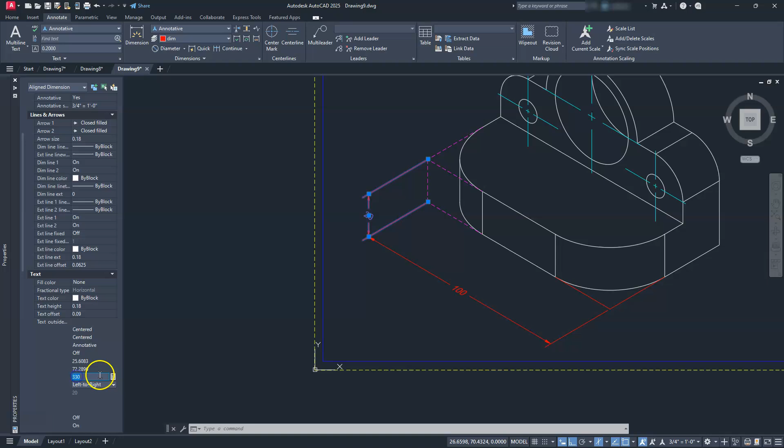So I'm going to leave mine facing this way, and then also I'm going to change the annotation, right? So I can tell it that I can use this 30, or I can use my negative 30. In my case, I'm just going to use the 30.

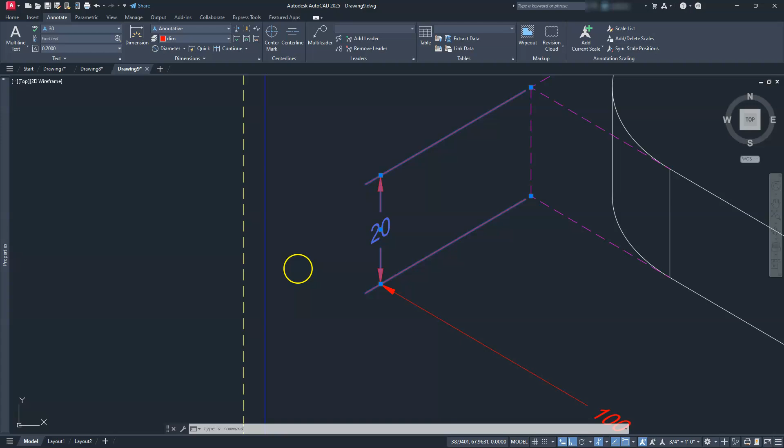Okay. All right. So hopefully you're kind of enjoying some of this stuff. I don't know if you like doing these kind of videos or me showing you how to do some kind of behind the scene things here.

So I'm just going to go ahead and copy these, and I'll use the type in method now. So CO, enter, go from this endpoint to the other one. Let's draw a line between here. Then I'll use the match property. So MA, enter. Select the source one first and then select these over here. Okay. And this is basically how I would set this up if I was doing this, right? So you can either choose to kind of do it this way, or it's a lot easier to do some of the other drawing stuff that we did.

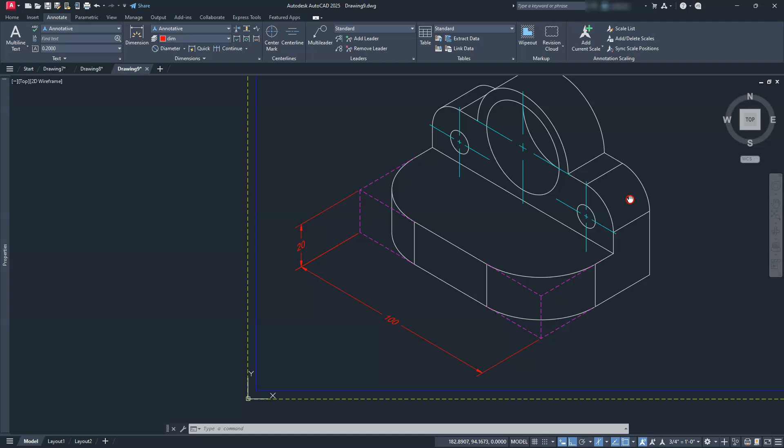I know this video is getting kind of long, so I'm not going to bore you with too much longer of this. I'm just going to kind of speed through the rest of this, and you can kind of follow along. I don't think I need to really talk too much more about the step-by-steps on how to do this. It's going to all be the same concept. So at this point, I might even accelerate this part in the video, make it about 2x fast. So, and we'll see how quick I can basically get this.

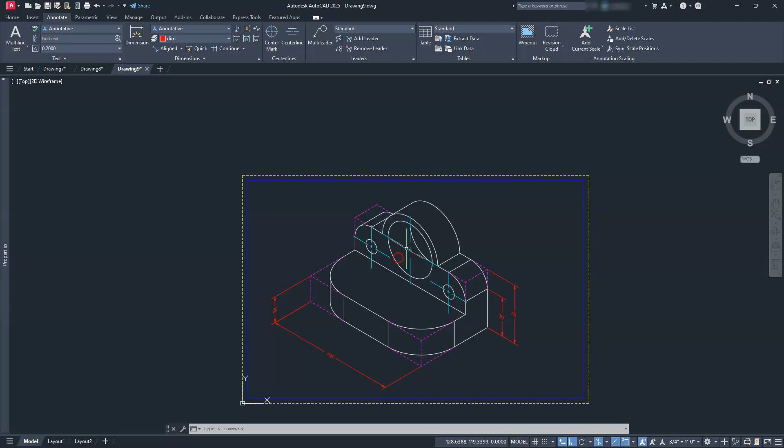Okay, I don't know if I want to finish all of this. I think what I'm going to show you now is just doing some circles and things of that nature. So we don't have a diameter dimension, and you'll see that if I try to utilize that by selecting here, it's going to tell me that is not a circle or an arc.

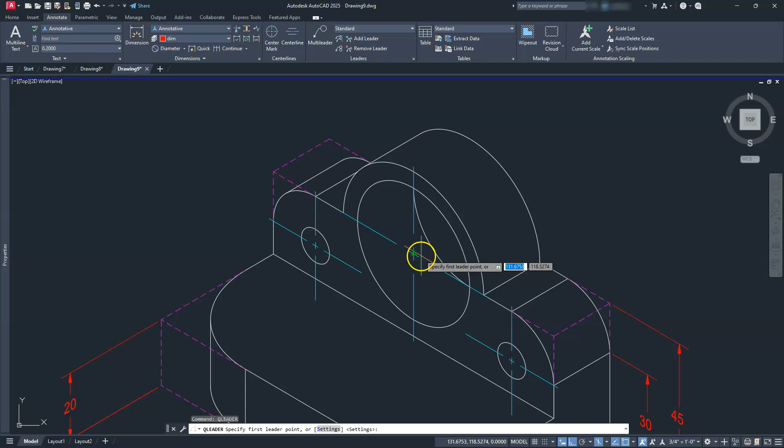So in order to do that, we have to use leaders. I'm just going to type in QL, that stands for quick leader. What I like to do is go to the center first. Let me back it out over here. The width of the text should be about there, that looks fine to me. Remember, this is where we have to recall some of this stuff we used. So %%C.

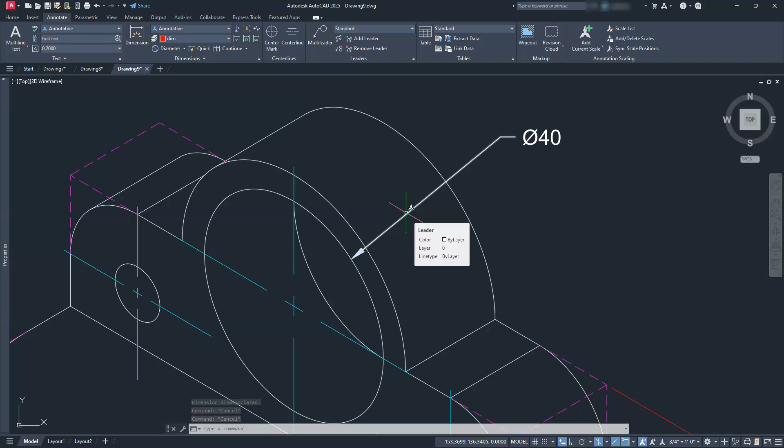What is the diameter? 40. So I'll have to do this, and what I like to do is point to the center first. That way, when I come back and select this leader line, I'll click on that endpoint, and then I'll find where it intersects here. One of the rules here is that your diameter dimensions and radius dimensions always need to point to the center, right? That's why I'm doing it that way.

And likewise here, if I wanted to do a radius, I would do a quick leader. I will come to this center, come up to here, go ahead and hit enter twice. I will type in R25, enter, enter.

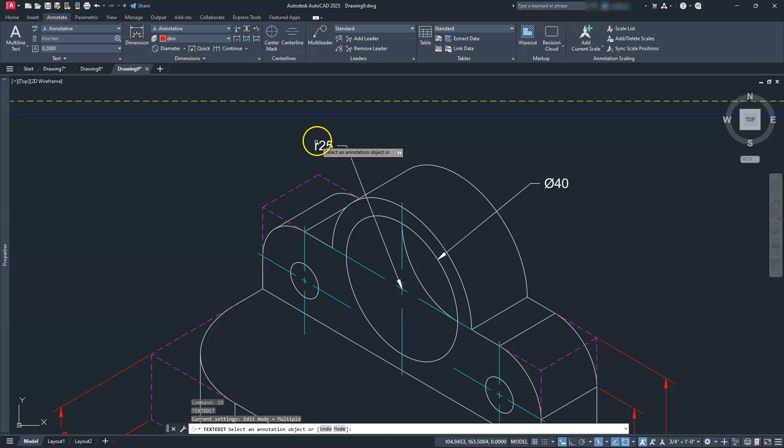And it looks like I used a lowercase r. I'm just going to go ahead and edit this dimension and use a capital R. Okay.

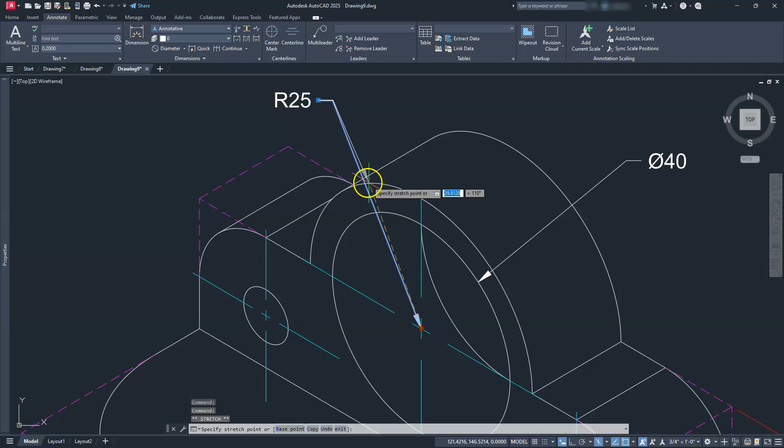And just like I did before, I will escape out of here, select this endpoint, and then I'll go ahead and click here and place it at that intersection, right? So that's kind of the hint behind these two circles here, and likewise with this radius.

Now we also can do some of that obliquing stuff, more or less we'd have to do it with the text rotation. Let's see if I have that option here, so it's going to be here. If I tell it 30 degrees, let's take a look and see which way it goes. Don't think I like it. I think I'm going to leave this at 0, because the negative 30 is going to be the opposite effect. We could play around with that a little bit, I guess, but from what I learned and what I've done over the years, I usually leave it looking like this.

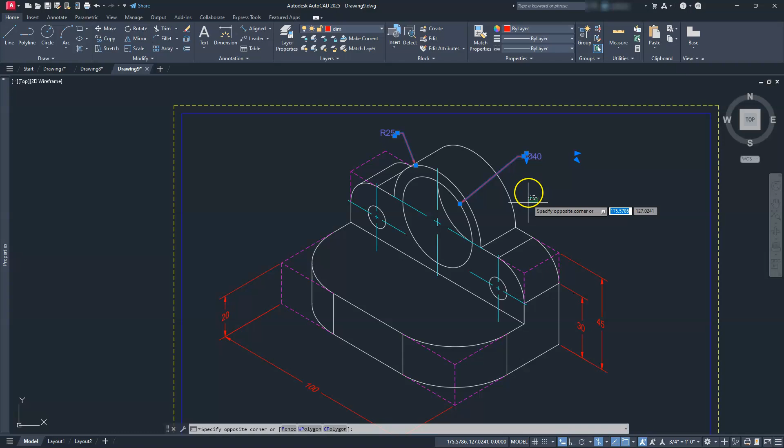So that's more or less how we would do some more of this kind of stuff here. I'll go ahead and put this on the right layer, and I don't want to take up too much of your time. I see this video is getting quite long, but did I get it on the right layer? Okay, yeah. You can see that this is kind of how you would set this up, and you would go through this and likewise.